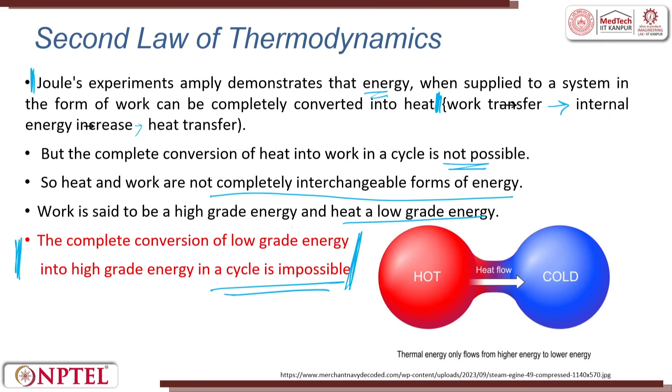But the complete conversion of heat into work in a cycle is not possible. So heat and work are not completely interchangeable forms of energy. Work is said to have a higher grade energy and heat is said to have a lower grade energy. The complete conversion of low grade energy into high grade energy in a cycle is impossible, as Joule's experiments demonstrated.

The second law states that not all energy can be converted into a useful form. The first law said energy will be transferred from one form to another, but the second law states that not all energy can be converted into a useful form. This means there is a loss in the conversion, and there is a natural tendency for a system to evolve toward a state of increased disorder or randomness, which is quantified as entropy.

So the conversion leads to a natural tendency for the system to evolve towards a state of increased disorder. In the second law of thermodynamics chapter, we will keep focusing on entropy. If you want to correlate with previous knowledge, when we draw a PV diagram, we also draw a TS diagram, temperature entropy diagram. Entropy is represented as S.

What are the aspects of the second law? It helps identify the direction of the process - in which direction the energy is getting converted. Next, it establishes conditions for equilibrium. The third thing is it also asserts that energy has quality as well as quantity. Quantity means it also talks about the magnitude. These are all the aspects of the second law.

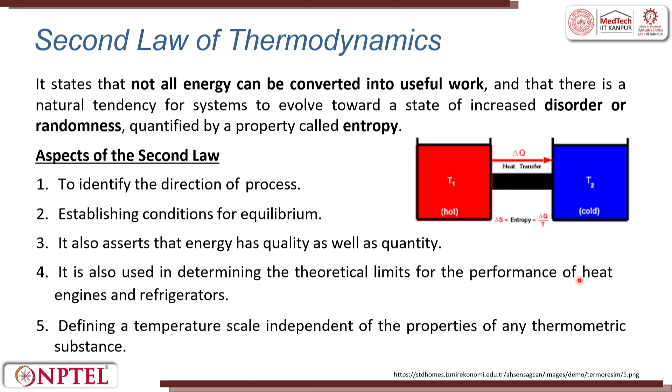Now let us try to understand the concept of thermal energy reservoir, abbreviated as TER. It is a hypothetical body with a relatively large thermal energy capacity that can supply or absorb a finite amount of heat without undergoing any change in temperature.

From the sun, you have heat trying to hit the earth - a large thermal energy capacity that can supply or absorb a finite amount of heat without undergoing any change in temperature. Examples are ocean, river, atmospheric air. The TER that supplies energy in the form of heat is known as the source. Now we introduce the concept of source and sink - source is the supply of energy and sink is a place where it absorbs energy.

Thermal reservoirs are essential in the analysis of the Carnot cycle or a refrigerator and other idealized systems, which provide boundary conditions that help in determining the maximum possible efficiency. So, from source to sink, how is the energy getting transferred?

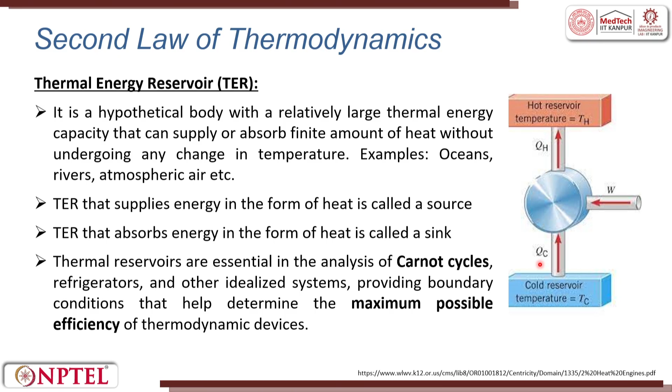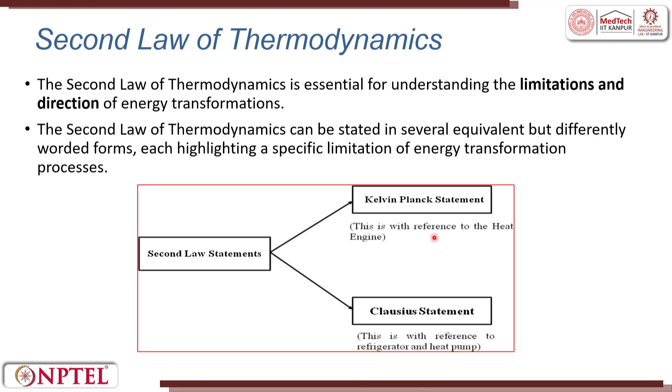The second law of thermodynamics is essential for understanding the limitations and directions of energy transfer. It has two basic statements: one is called the Kelvin-Planck statement, the other is called the Clausius statement. Kelvin-Planck statement is with reference to the heat engine, and Clausius statement is with reference to the refrigerator and heat pump. Now let us understand what a heat engine is.

A heat engine is a cyclic device used to convert heat to work. So there is a heat source and a sink, Q1 and Q2. You can see the direction it comes, and in the heat engine you try to get the work done. The heat engine can be characterized by the following points.

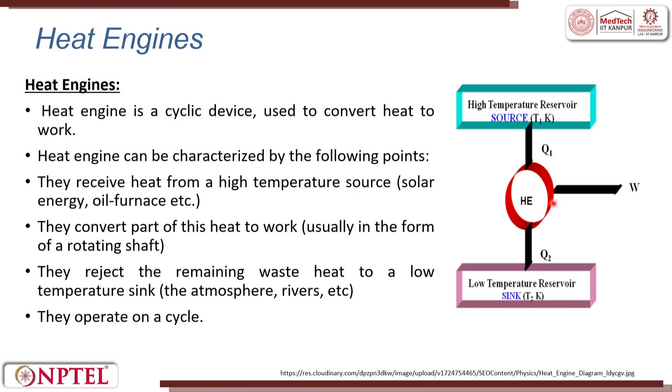They receive heat from a higher temperature and convert the heat into work, usually in the form of rotating a shaft, as in a turbine engine. The rejected residue, which is waste heat, is sent to the lower sink. They operate on a cycle. Heat engines are fundamental to many energy conversion systems, including internal combustion engines, steam turbines, gas turbines and jet engines. The basic working of a heat engine involves 4 steps.

The first step is heat input, called Q in, absorbed from the higher temperature reservoir. Part of the energy is converted into work by expanding a working fluid, which can be steam, gas, whatever it is. Then the working fluid is cooled. Finally, heat is rejected, called Q out, to a lower temperature reservoir. The engine then returns to its original state to repeat the cycle, going repeatedly to form a cycle.

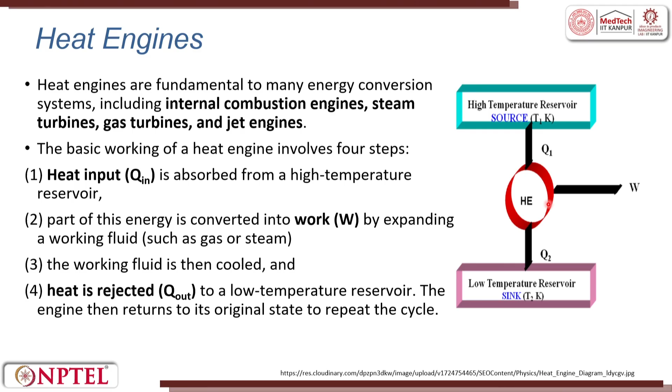To calculate the thermal efficiency of a heat engine, we use the efficiency term eta, defined as the ratio of useful work output to heat input: W net by Q in, which is equal to 1 minus Q out by Q in. Through this we always try to get the efficiency of the system. This equation shows there is always heat which must be rejected, meaning no heat engine can have 100% efficiency as per the second law of thermodynamics, which is also true in reality.

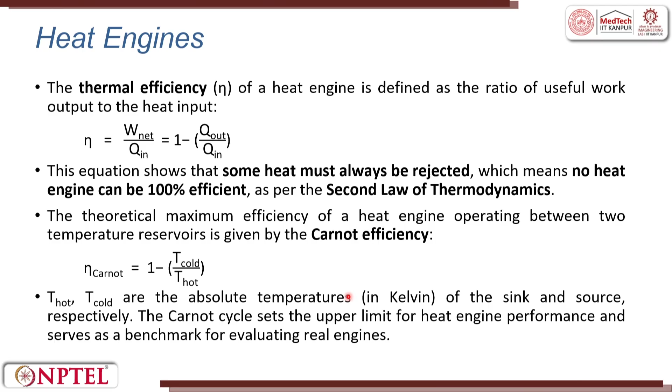The theoretical maximum efficiency - the first one we did for heat engine, right. Next we take it for Carnot. The efficiency of a heat engine operating between two temperature reservoirs is given by Carnot efficiency: eta Carnot equals 1 minus T cold by T hot. T hot and T cold are the absolute temperatures at the sink and source. The Carnot cycle sets the upper limit of heat engine performance and serves as a benchmark for evaluating real engines. That is why we always talk about the Carnot cycle.

What are the components? Heat source supplies thermal energy at a higher temperature. Working substance is typically a gas or vapor that undergoes expansion or compression. The engine mechanism converts expansion of the working substance into mechanical work, like your heat engine. The heat sink is also similar. We have added one more term, called the cycle controller, which manages the cyclic process and controls timing.

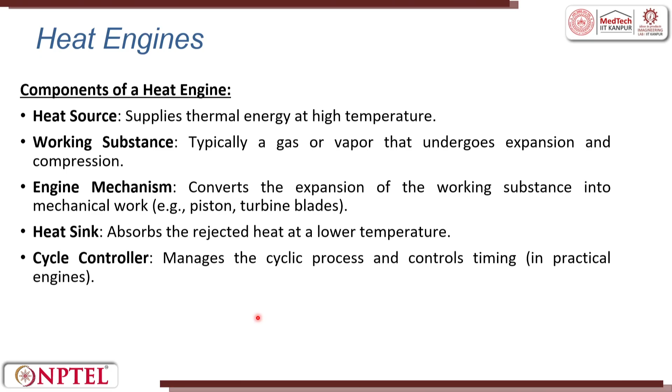There are common heat engines. One is the Carnot cycle, which is ideal and reversible. Then the Otto cycle, used in petrol engines. The Diesel cycle is used in diesel engines. The Rankine cycle is used in steam turbines. The Brayton cycle is used in gas turbines and jet engines.

The Carnot cycle is ideal and reversible. When we draw a PV diagram, we can see from A to B it is isothermal expansion, from B to C is adiabatic expansion, C to D is isothermal compression, and D to A is adiabatic compression again. So the isothermal process is Q in, which happens between A and B, and between C and D there is always a rejection.

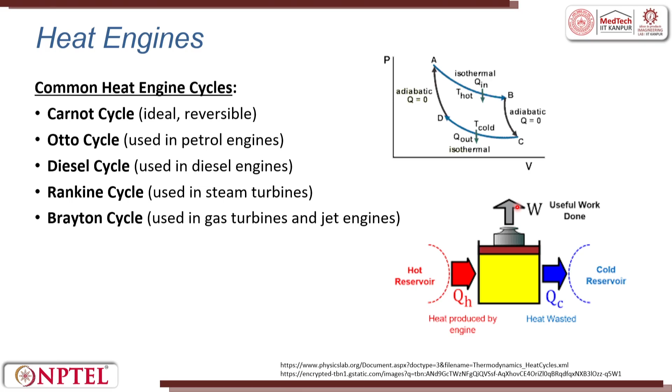At B to C and A to D, the adiabatic Q is always equal to 0. You can see here schematically a hot reservoir where Q is pushed into an engine, and then you try to get a Q out at a cold reservoir. You have a weight. When the heat is applied, the gas expands and the weight moves higher, or is pushed to a higher level.

Let us now try to understand the concept of a heat pump. Heat pump is another cyclic device. Heat engine is a cyclic device. Heat pumps are also cyclic devices. They are used to transfer heat from a lower temperature to a higher temperature.

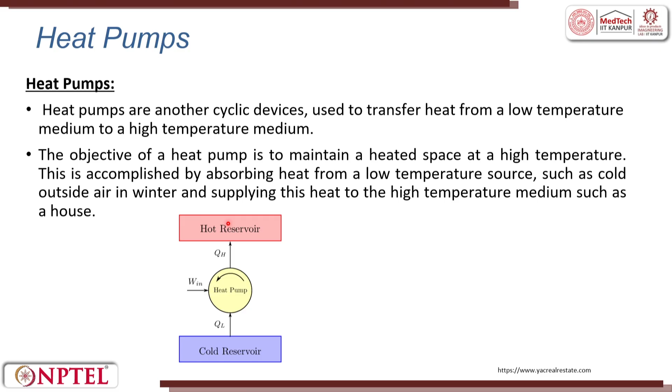Here work is done such that the heat pump operates from a lower temperature to a higher one. Unlike a heat engine that converts heat into work, or a refrigerator that cools a space by removing heat, a heat pump is primarily used for heating, delivering heat to a warmer space by extracting it from a colder environment. So heat pump and heat engine are different. This is especially used for space heating in winter, where ambient outside air, soil or water serves as a cold source and the heated indoor space is the hot sink.

Heat pumps operate on a reversed Carnot cycle, or more practically on the vapor compression refrigeration cycle, much like a refrigerator or an air conditioner. The system includes 4 components: compressor, condenser, expansion valve and evaporator.

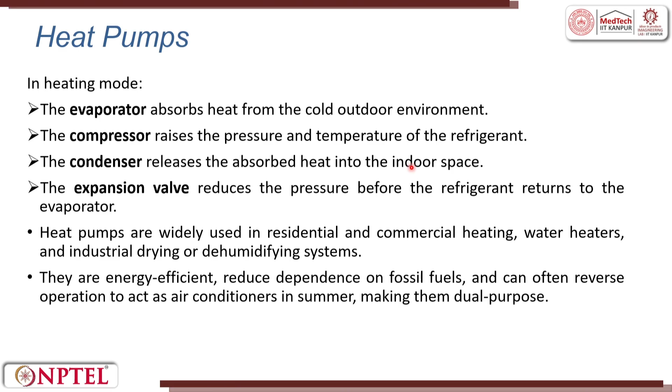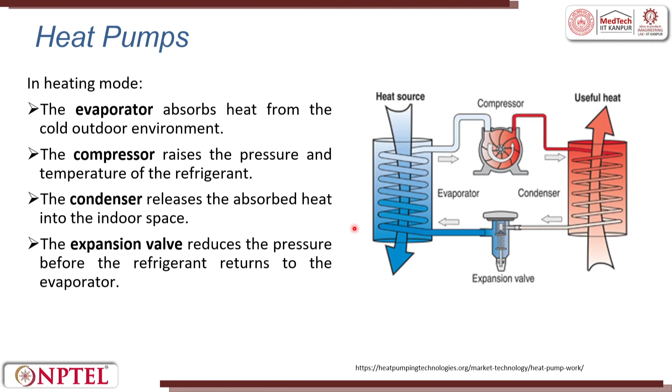The compressor raises the pressure and temperature. The condenser releases the absorbed heat into the indoor space. The expansion valve reduces the pressure. So the expansion valve reduces pressure, while the compressor increases pressure. The expansion valve reduces the pressure before the refrigerant enters the evaporator.

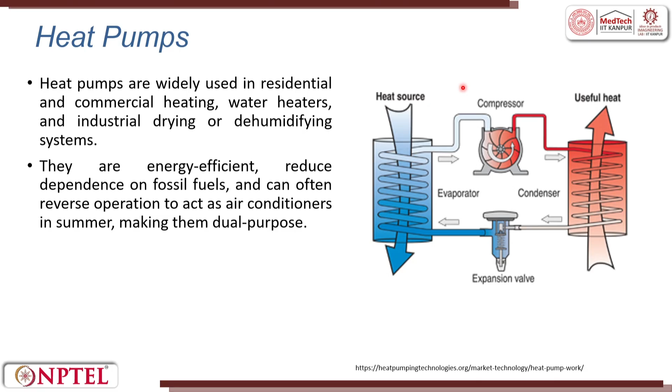Now let us go back to the Kelvin-Planck statement of the second law. It is impossible for any device that operates on a cycle to receive heat from a single reservoir and produce a net amount of work. This is what the Kelvin-Planck statement crudely makes - it is impossible for any device that operates on a cycle to receive heat from a single reservoir and produce a net amount of work.

You can see a thermal reservoir where a work cycle is done - the system undergoes the thermodynamic cycle here, but it's not there. The Kelvin-Planck statement asserts that no heat engine can operate in a cyclic process and convert all heat it absorbs from a higher temperature reservoir entirely into work without rejecting some heat to a lower temperature reservoir. So you can never convert all the heat grabbed from a heat source back into work without undergoing a certain amount of loss.

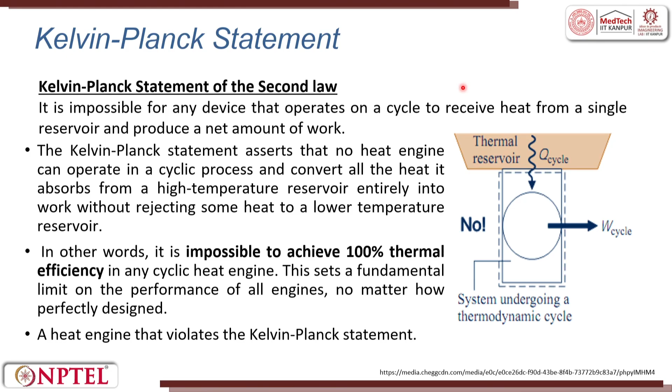It is impossible to achieve 100% thermal efficient cyclic heat engines. In the figure below, even under ideal conditions, the heat engine must reject some heat to a lower temperature reservoir in order to complete the cycle. That is, no heat engine can convert all the heat it receives into useful work.

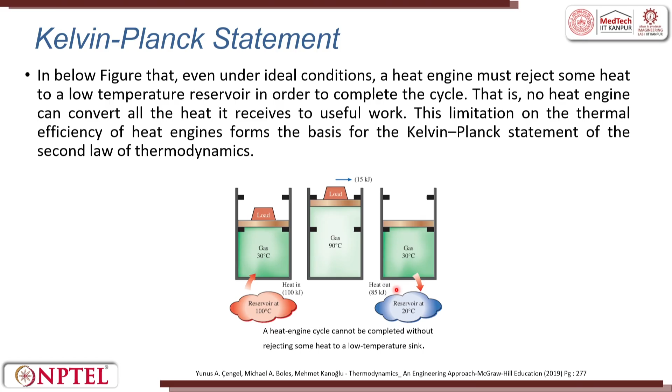This limitation on the thermal efficiency of a heat engine forms the basis of the Kelvin Planck statement of the second law of thermodynamics.

The heat engine must exchange heat with a lower temperature sink as well as a higher temperature source to keep operating. So the Kelvin Planck statement can also be expressed as: no heat engine can have a thermal efficiency of 100%, or, for a power plant to operate, the working fluid must exchange heat with the environment as well as the furnace.

Here we see a thermal energy source where 100 kilowatts is given. There is a heat engine, with QL and work output of 100 kilowatts. The heat engine that violates the Kelvin Planck statement of the second law is derived here.

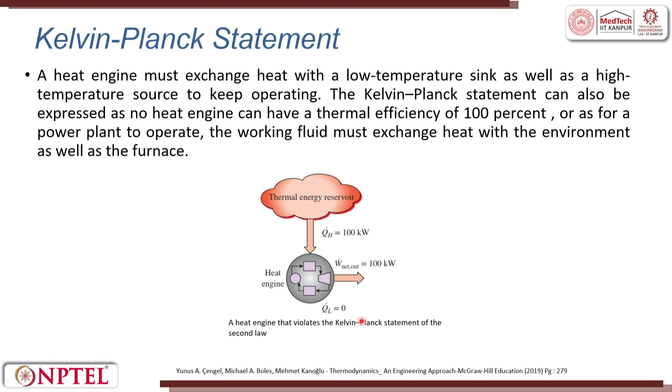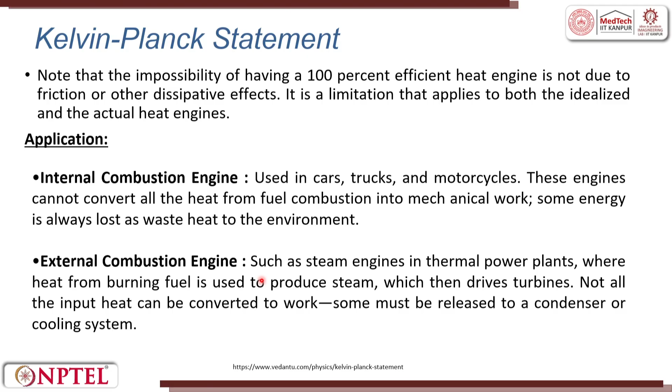Applications of the Kelvin Planck statement: internal combustion engines and external combustion engines. Internal combustion engines are cars, trucks, motorcycles, as you know. External combustion engines are such as steam engines in thermal power plants, where heat from burning fuel is used to produce steam, which then drives a turbine. Not all the input heat is converted into work; some is released to a condenser or cooling system. Gas turbines are another application. Power plants, including thermal, nuclear and geothermal plants, use heat to generate electricity, and these plants also don't operate at 100% efficiency.

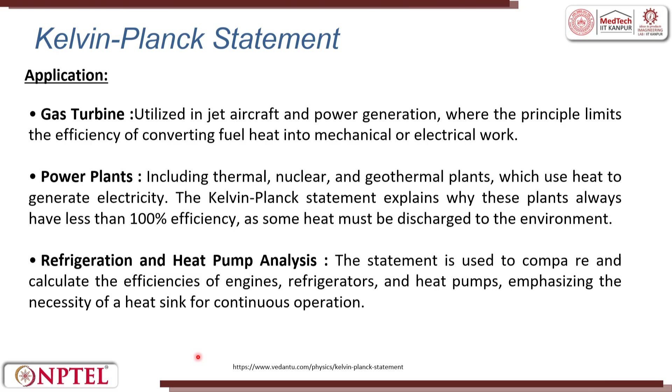The refrigeration and heat pump analysis statement is used to compare and calculate the efficiency of engines, refrigerators and heat pumps, emphasizing the necessity of a heat sink for continuous operation.

Now let us move to the Clausius statement. It is impossible to construct a device that operates in a cycle and produces no effect other than the transfer of heat from a lower temperature body to a higher temperature body. The Clausius statement emphasizes that heat cannot flow spontaneously from a colder body to a hotter one without external work being done on the system.

So from cold to hot, if heat has to go, there has to be some work done. This explains why refrigerators and heat pumps require energy input to move heat against its natural direction. This is a point that is often asked in interviews.

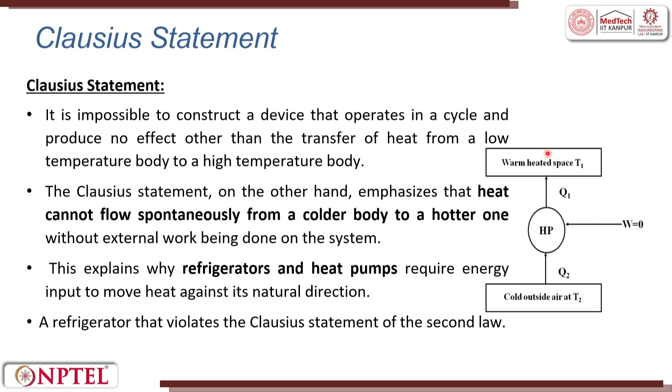A refrigerator that violates the Clausius statement of the second law is given here. This way, the net effect on the surrounding involves consumption of some energy in the form of work, in addition to the transfer of heat from a colder body to a warmer body. That is, it leaves a trace in the surrounding.

Both the Kelvin Planck and Clausius statements of the second law are negative statements, and negative statements cannot be proved. Like any other physical law, the second law of thermodynamics is based on experimental observation. To date, no experiments have contradicted the second law, and this should be taken as sufficient proof of its validity. So these two statements only explain how this law is still accepted in reality.

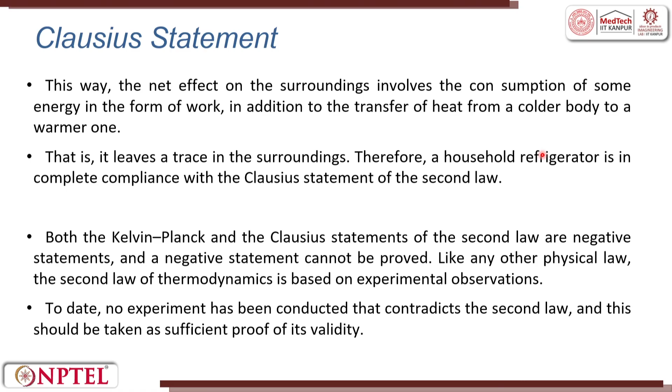Applications: refrigerators and heat pumps are part of the Clausius statement. Air conditioning is an example. Thermodynamic analysis.

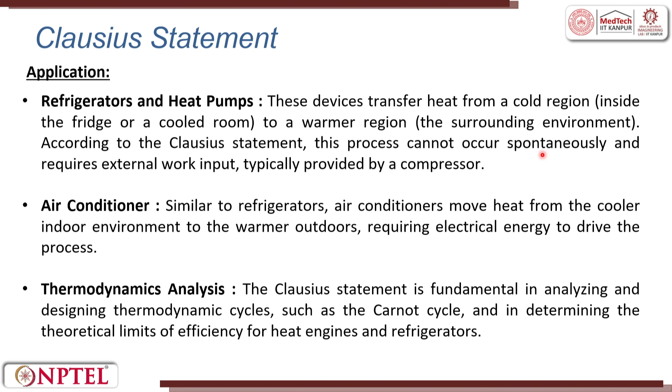The Clausius statement is fundamental in analyzing and designing thermodynamic cycles such as the Carnot cycle, and in determining the theoretical limit of the efficiency of heat engines and refrigerators. So now there is a possibility of the Clausius statement.

The Clausius statement: equivalency of two statements. Kelvin-Planck and Clausius statements are equivalent in their consequences, and either statement can be used as an expression of the second law of thermodynamics. Any device that violates the Kelvin-Planck statement also violates the Clausius statement.

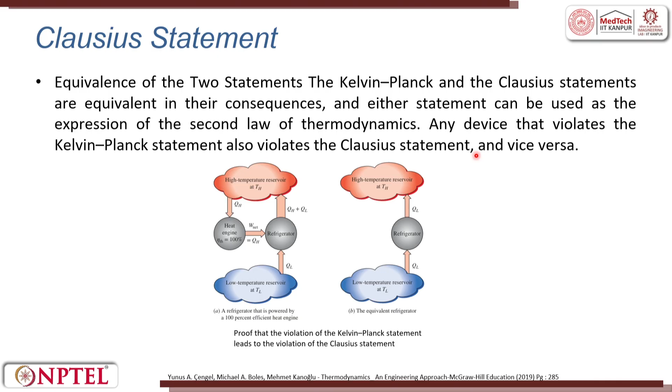So if it violates Kelvin-Planck, the Clausius statement is also violated, and vice versa. That is what is explained here: the equivalency of Kelvin-Planck and Clausius statement. The equivalency is demonstrated by showing that violation of each statement implies the violation of the other.

From here you can see, from Q2, the Clausius statement is obeyed in this first one, and the Kelvin statement is violated here. T1 gives heat to the heat engine He, and it gives you W. This W goes to the heat pump Hp, and here Q2 plus W goes to T1. This is violation of the Kelvin-Planck statement. So the heat engine takes Q1 and gives Q2, where Q2 equals 0.

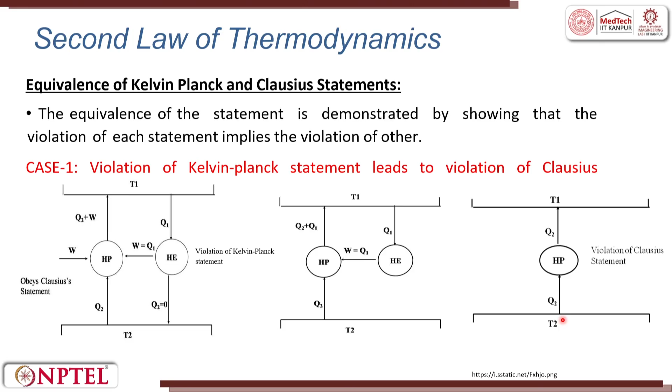So it is a violation. You can take it from here: T1 goes to He where W equals Q1, and then this Hp is operating. So from here, Q1 plus Q2 is there. The last one is violation of the Clausius statement: Q2 to Q1, and there is no work done at all.

Thus, violating the Kelvin-Planck statement has led to the violation of the Clausius statement. Violation of the Clausius statement leads to violation of the Kelvin statement. In the previous one, it was violation of Kelvin-Planck leading to Clausius; here it is violation of Clausius leading to violation of Kelvin-Planck.

So you can see here T1, T2. There is the heat pump Hp, and the work done is 0. So Q1 leads to Q1. In the second case, with Q1 and Q2, we have the heat engine He where the work done equals Q1 minus Q2.

The next thing is T1, T2, where Hp, the heat pump, has work equal to 0. It has taken Q1; from Q1 you tap it and give it to He, and then this is Q2, where W equals Q1 minus Q2.

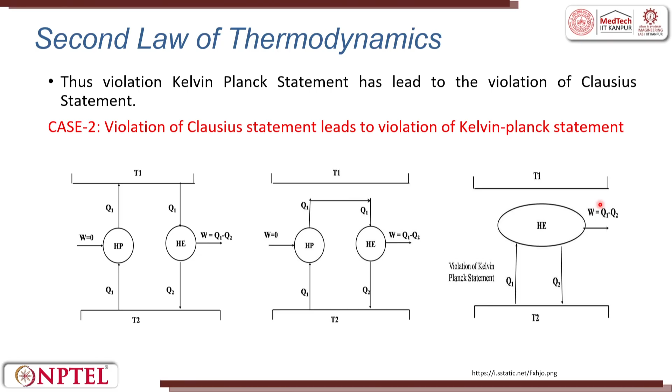So here the Clausius statement is getting invalidated. Violation of the Kelvin statement is: He, you give Q1 and then draw Q2, W equals Q1 minus Q2. So all these equivalent circuits are drawn to show you one statement leading to the violation of the other. Thus the violation of Kelvin-Planck statement has led to the violation of the Clausius statement.

At first sight, Kelvin-Planck's and Clausius's statements may appear unconnected, but it can be easily shown that they are virtually two parallel statements of the second law and are equivalent in all aspects. That is why we always take these two laws together. The equivalency of the two statements is proved by showing that the violation of one statement implies the violation of the other.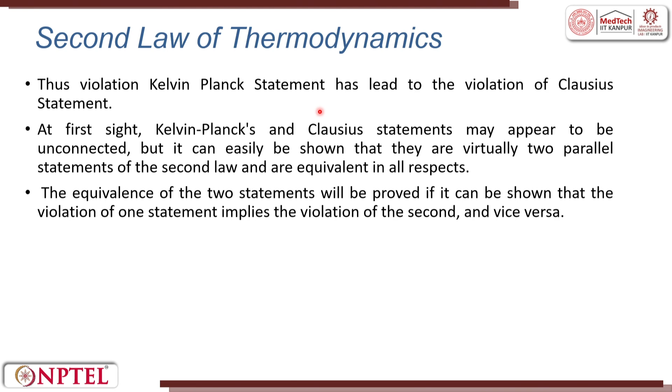In the last part of this lecture, we will try to discuss reversibility and irreversibility. The second law of thermodynamics enables us to divide all processes into two classes: reversible and irreversible, ideal process and natural process.

A reversible process is one which is performed in such a way that at the conclusion of the process, both the system and the surroundings may be restored to the initial state without producing any change in the rest of the universe. The reversible process is carried out infinitely slowly with an infinitesimal gradient, so that every state passed through by the system is an equilibrium state.

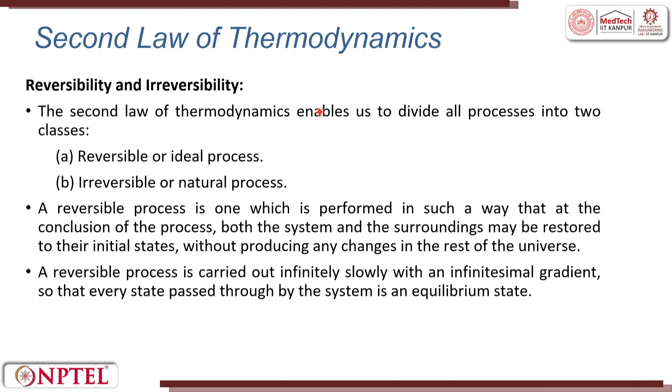The irreversibility of the process may be due to either of two causes. One is lack of equilibrium during the process. There can be mechanical, thermal, or chemical inequilibrium, between the system and the surrounding, between two systems, or between two parts of the same system, causing a spontaneous change which is irreversible.

The other cause is involvement of dissipative effects. The irreversibility of a process may be due to dissipative effects, in which work is done without producing an equivalent increase in kinetic or potential energy of any system. So there can be two effects causing an irreversible process.

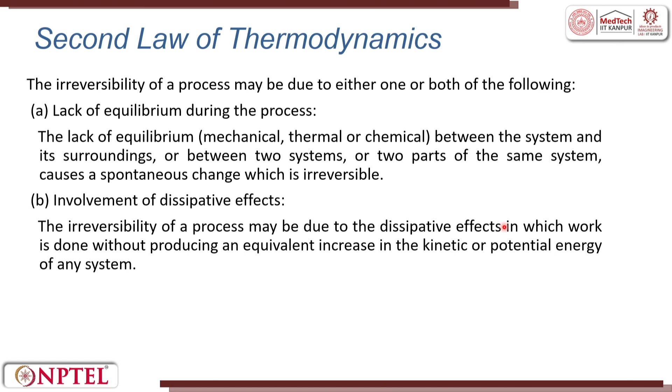Thus, to conclude, in this lecture we have stated and explained the first law: energy is a property of a system, the first law of thermodynamics and its limitations, and the second law of thermodynamics, wherein we saw the Kelvin-Planck statement and the Clausius statement. Then we tried to see reversibility and irreversibility.